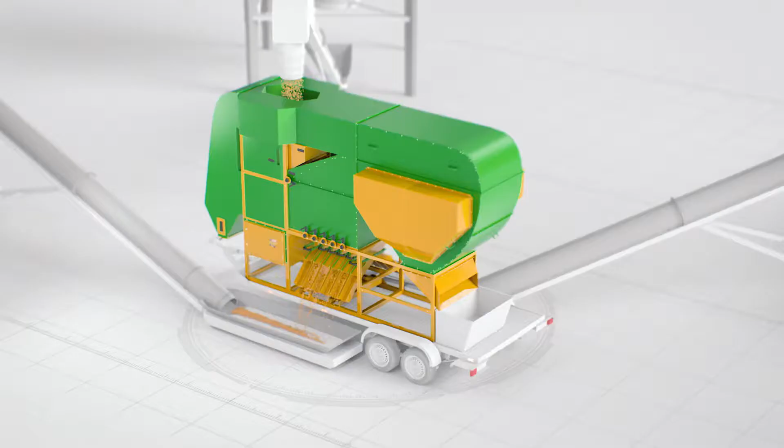Using the latest technologies and aerodynamic principles, we have created optimized size grain cleaners with increased productivity and superior separation quality.

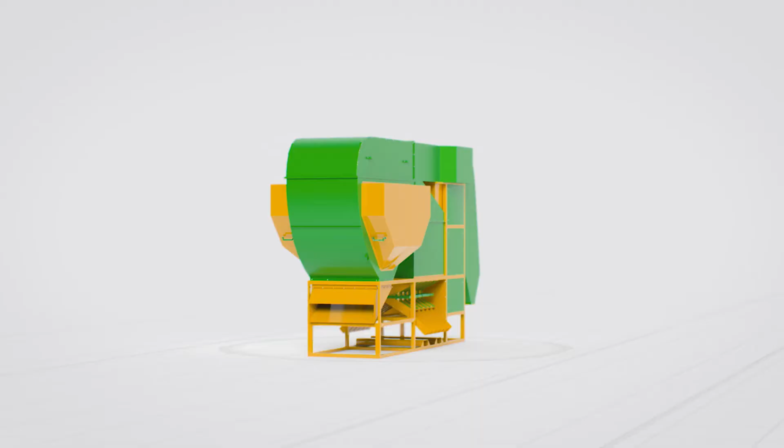How does Metra outperform the much bulkier grain cleaner copies available on the market? For each model size, we make precise calculation of the falling grain's trajectory, derived from 3 parameters: volume of air being pumped, static pressure, and dynamic pressure.

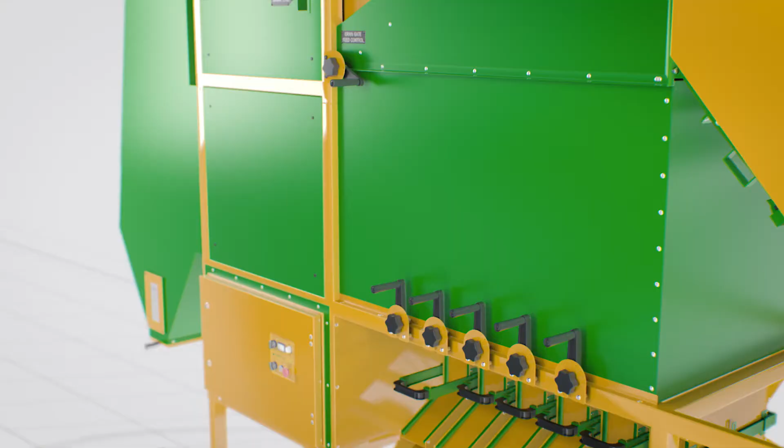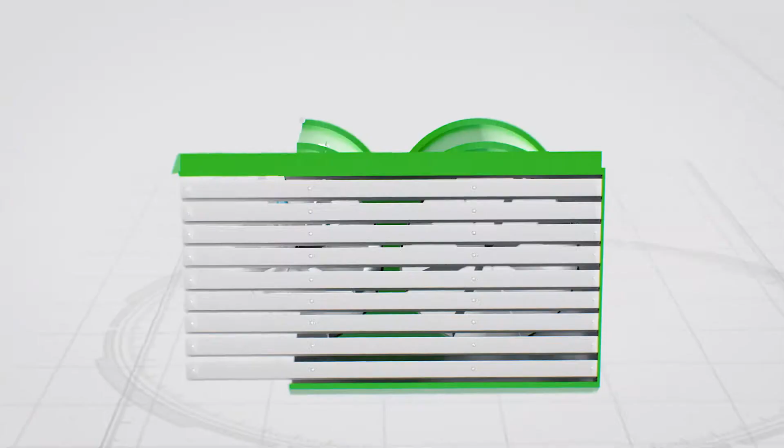Each unique model of Metra ADS cleaner is individually constructed with an according straight flow axial motor, propeller, flow straightener, and a set of nozzles. All specs are based on the fundamental aerodynamic principle. This allows us to achieve a variety of performance goals using just one cleaner.

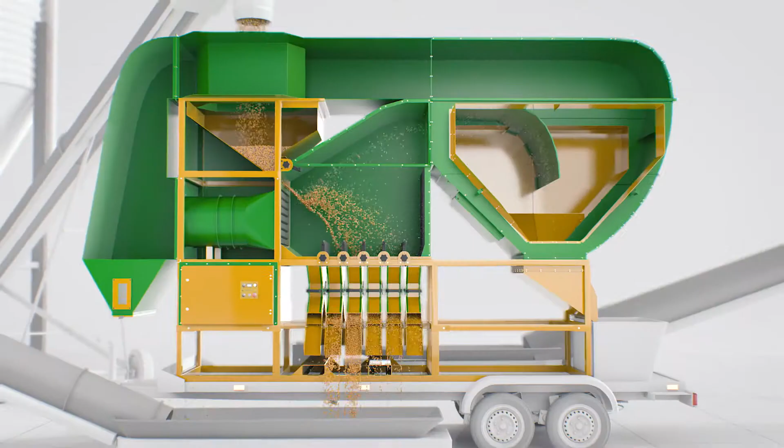With the extended height in our separation chamber, grain flies further and is suspended in the air longer. This directs the grain into correct discharge chutes with a maximum level of precision and a higher quality separation.

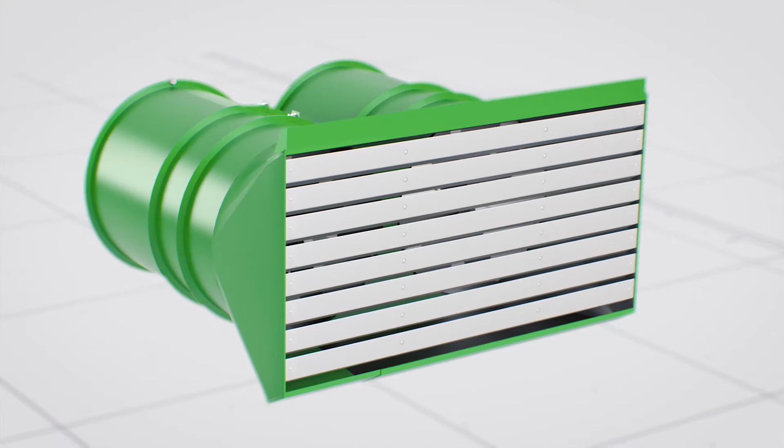The nozzle clearance and configuration are selected individually for each model. This enables the airflow generated by the nozzles first to break the grain layer evenly and then to perform accurate grading.

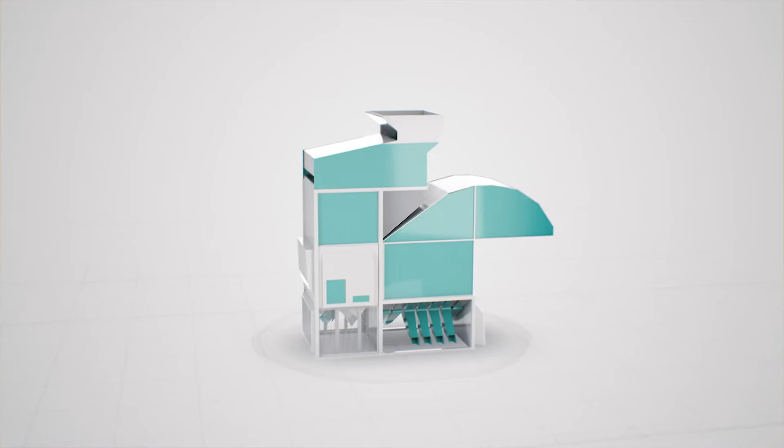The Metra unique technical features and design exclude the main disadvantages found in larger, bulkier copies, such as improper geometry of the power unit, higher power consumption, and inefficiency of space and overall function.

Metra grain cleaners are free of airflow swirling that adversely affects the cleaning quality.

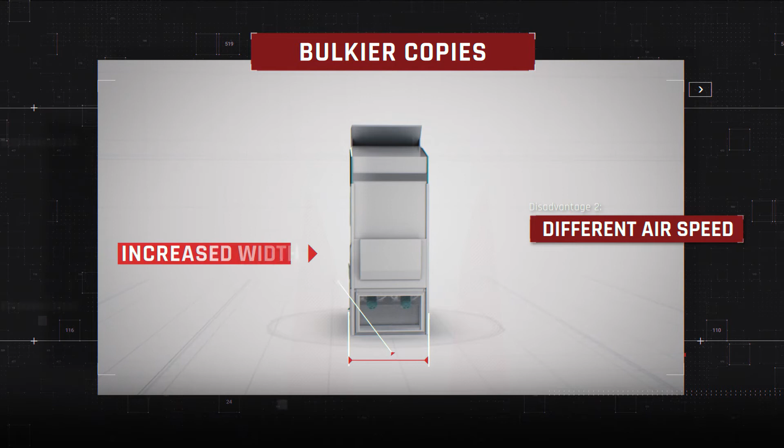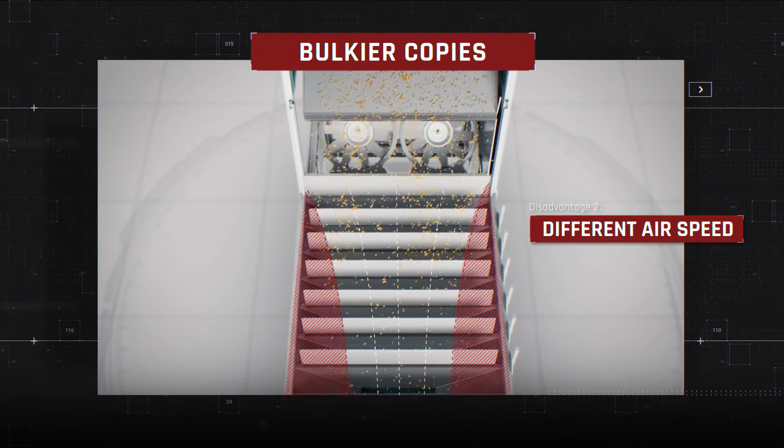Copy makers increase the width of the machine body in an effort to increase production volume. The disadvantage of this design is that due to the excessive width of the separating chamber, different air velocities occur at the edges and in the center, which leads to incorrect sorting of the grain.

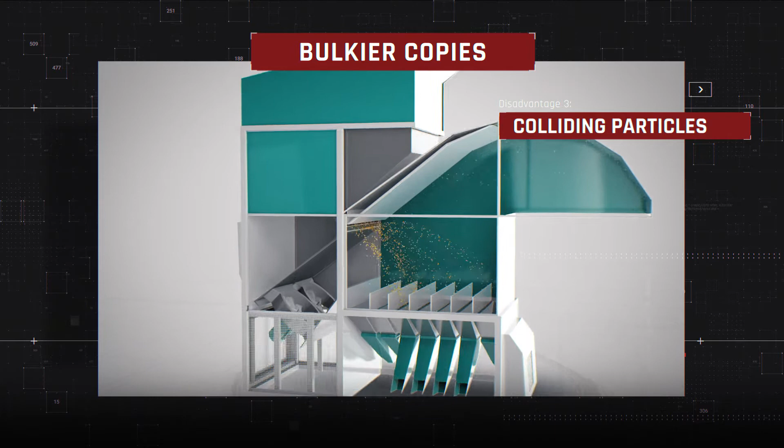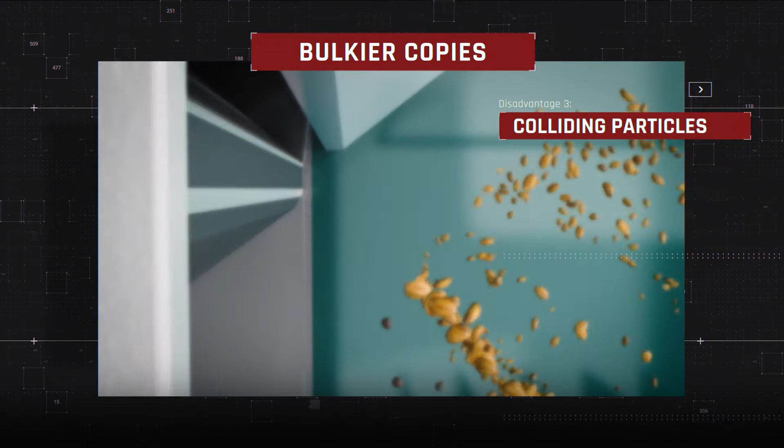Especially when separating complex crops, such as small seeds, grass seeds, vegetables, and other small crops, the feeding layer is too thin, which also negatively affects the separation quality. When falling, the grain particles collide with one another and sail in a wrong trajectory. As a result, the grain flies with an offset along the wrong path, which breaks the quality of sorting.

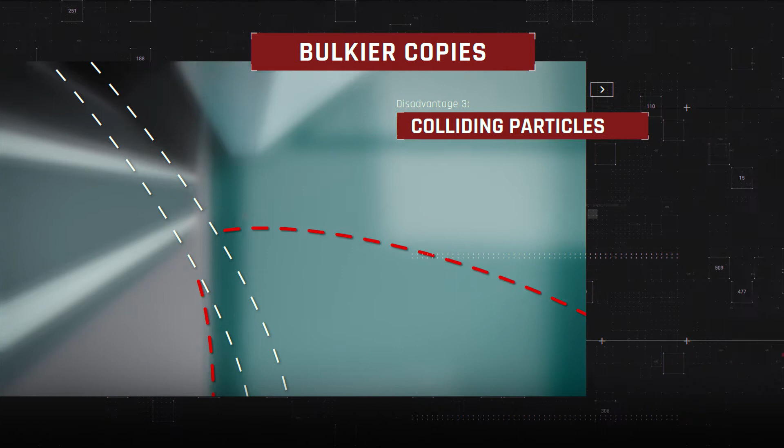The replica grain cleaners are designed without nozzles, which inhibits them from sorting irregularly shaped particles, such as corn, lentils, sunflower, melon seeds, including pumpkin, alfalfa, and mustard seeds.

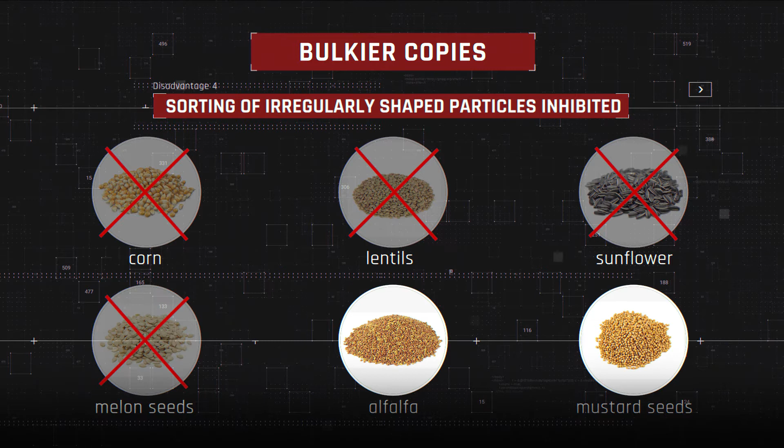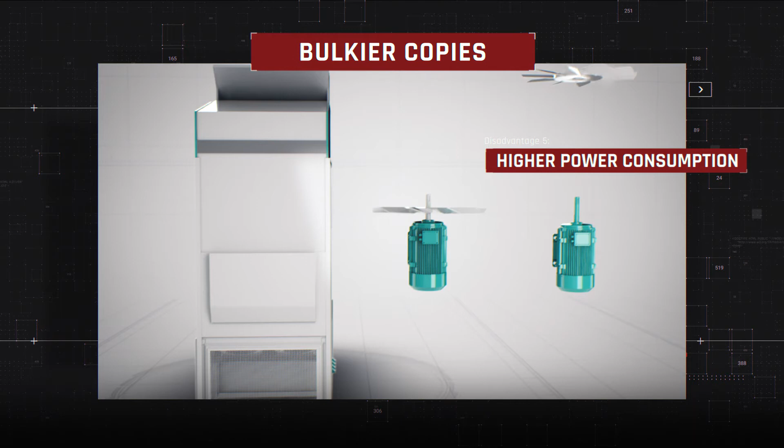Accordingly, larger housing width requires more powerful motors, or a greater number of them, to attain the appropriate static pressure. Also, this leads to higher power consumption.

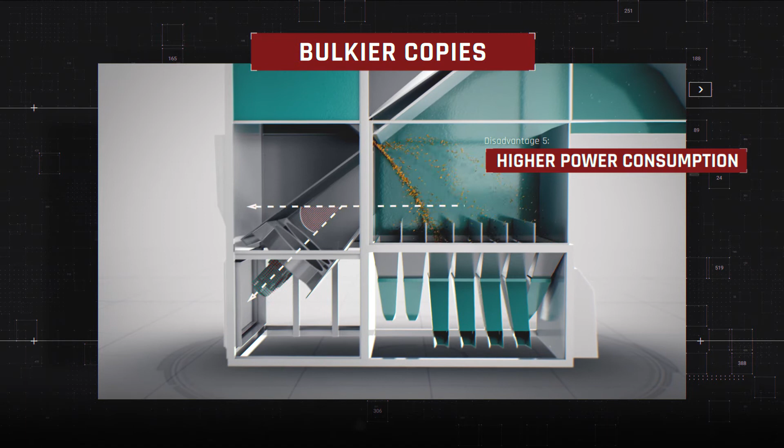When the power unit is positioned in an inclined plane, it increases the wear and tear on electric motors and significantly decreases their service life. Due to the lack of nozzles, vortex paths with specifically required air pressure cannot be generated.

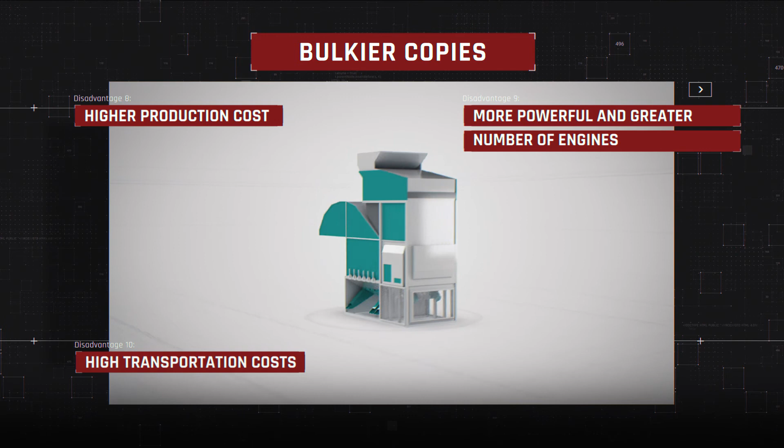Further, the disadvantages of replica cleaners include higher production costs, more powerful and greater number of engines, high transportation costs due to larger dimensions and weight, only partial use of stainless steel, which does not improve the performance of the grain cleaner.

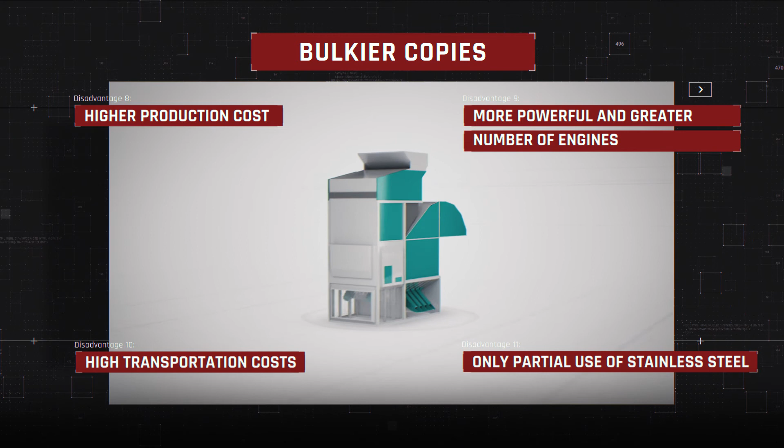To meet sterility requirements, the machine must be made entirely of stainless steel. Since the replica cleaner is made of ordinary metal, the sterility feature cannot be claimed.

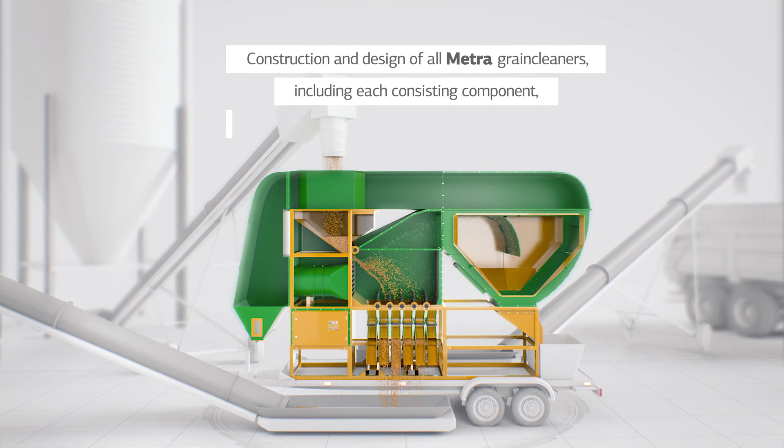Metra grain cleaners are made exclusively with certified materials and patented in the US and Canada.